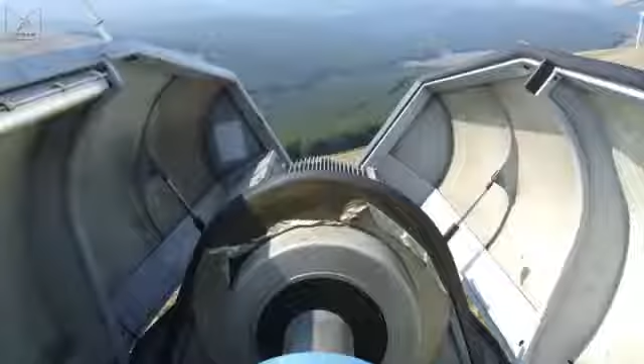Welcome. In this video, we'll show you the layout of a typical wind turbine generator as found on wind farms across the world. Now, exact designs do vary, but almost all the turbines in use today are horizontal axis machines, which have a three-bladed rotor spinning in a vertical plane attached to the front of a box which we call the nacelle, after the fairing around an aircraft engine. And in this nacelle we have the generator, often a gearbox, and occasionally a high-voltage transformer, and the whole thing sits on top of a tower, which is mostly there to keep the blades from digging a hole.

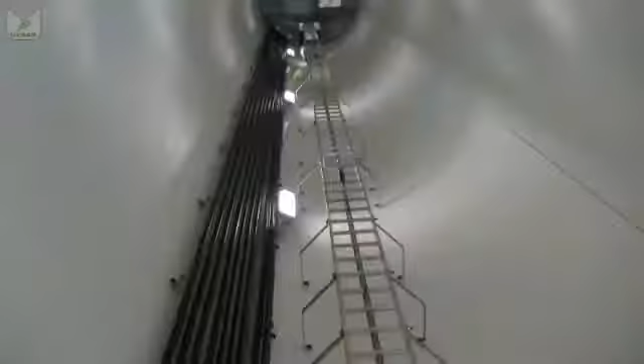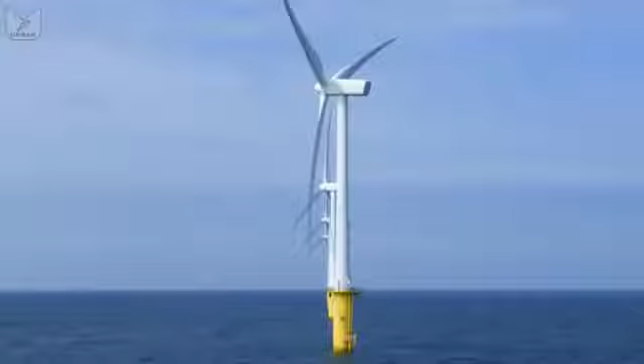We tend to class turbines by their power output, and hence their physical size. Wind farms might use many sub-megawatt turbines, each producing 400, 600 kilowatts each, or a few multi-megawatt turbines, producing maybe up to 3 megawatts per unit. Apart from physical scale, they are arranged a bit differently, so let's start by looking at a typical sub-megawatt model.

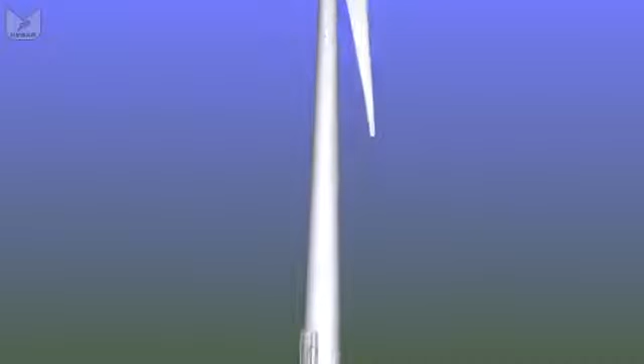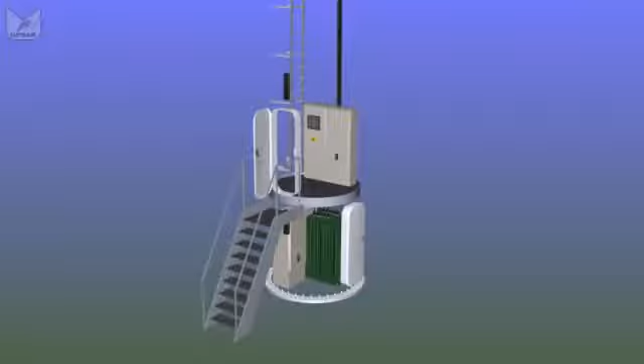Turbines of this type are typically 25 to 45 meters tall, and at the base you will often find two doors. The lower door takes you into a secured compartment where we have a high voltage step-up transformer. The generator at the top of the turbine is producing about 690 volts, and this transformer converts that into several thousand volts to send it more efficiently to the substation. The main entrance to the turbine is at first floor level, and there we find the control cabinet and the base of a ladder, or a series of ladders.

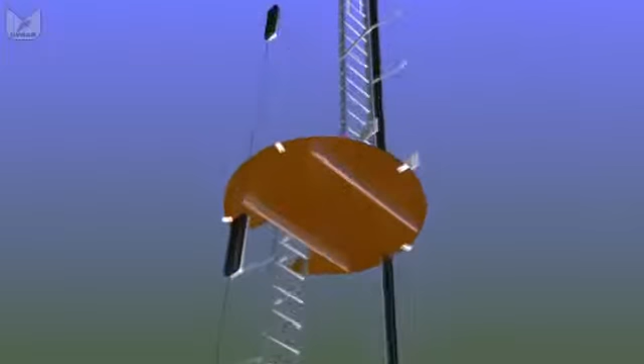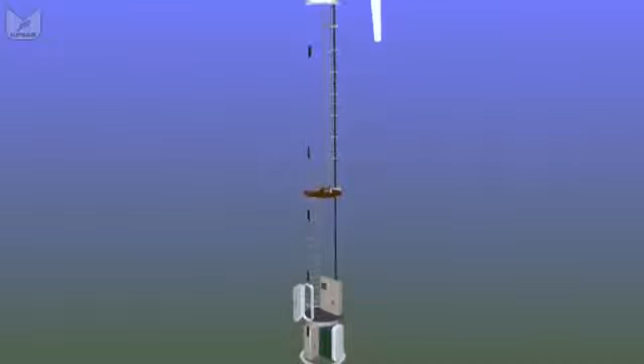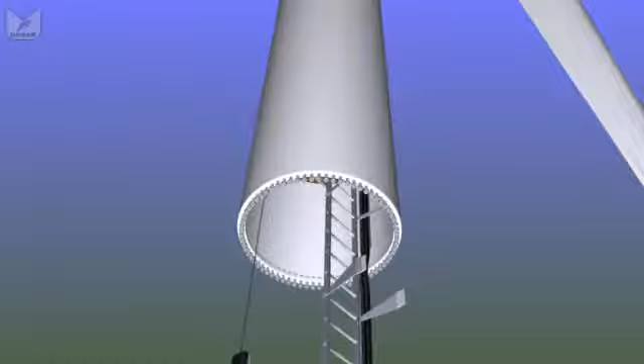Often in these smaller turbines, the ladders run to a series of platforms and they change sides at each platform to give you a rest area and a bit of fall protection. Platforms are generally just wooden discs suspended inside the tower walls, and they might have a trapdoor or a set of guardrails and a gate depending on how the ladders are arranged. The main run of cables goes up the wall of the tower, dodging past any intermediate junctions, because obviously the towers can't be delivered in a single 40-meter long section. They come in 20-meter long sections. They're bolted together with a lot of nuts and bolts. But as we move higher and higher through the platforms, they're getting slowly narrower and narrower, so the ladders are getting a little bit closer together.

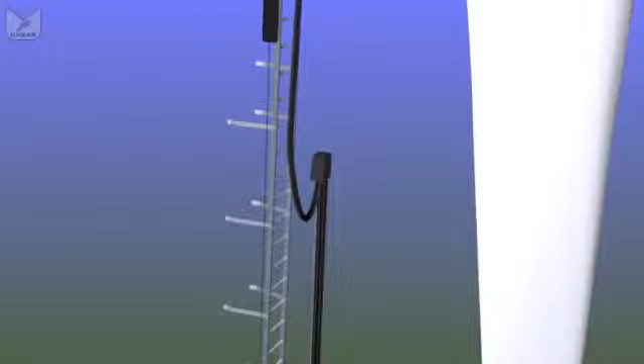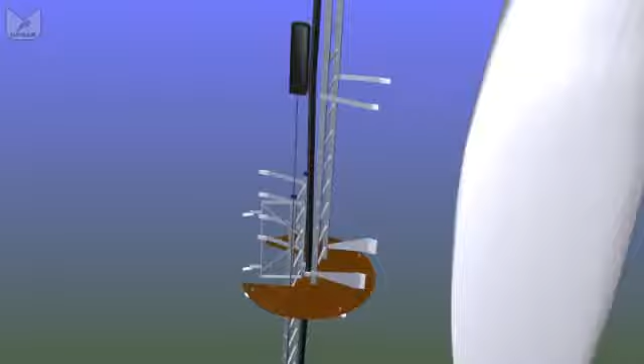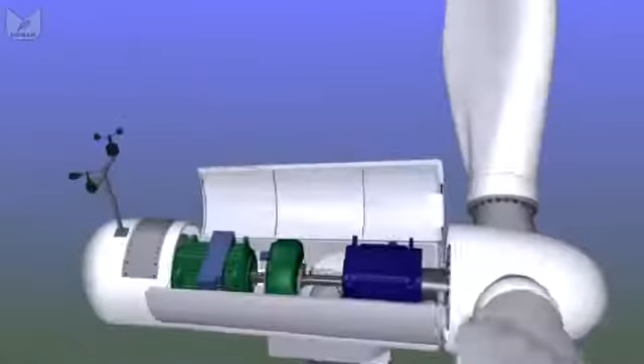But eventually the main cables stop being attached to the wall and they hang freely in the center of the tower, so they can twist as the nacelle rotates to face the wind. If they twist too many times, the nacelle will spin itself around to remove the twists. But as we move up, now the cable goes through a hole in the center of each platform, and at the top of the tower we have a steel platform with a sealed trapdoor, which we call the yaw platform. Just above that we have the yaw ring with the bearings that allow the nacelle and the rotors to rotate around to face the wind. And this sealed platform acts as a bit of fire protection, also avoids people falling back down the tower, because at the bottom of the nacelle we simply have a hole through which we climb.

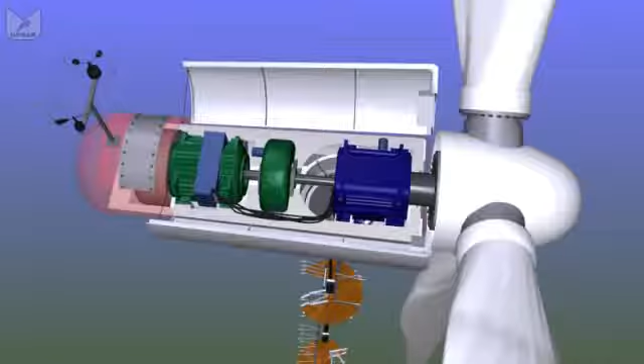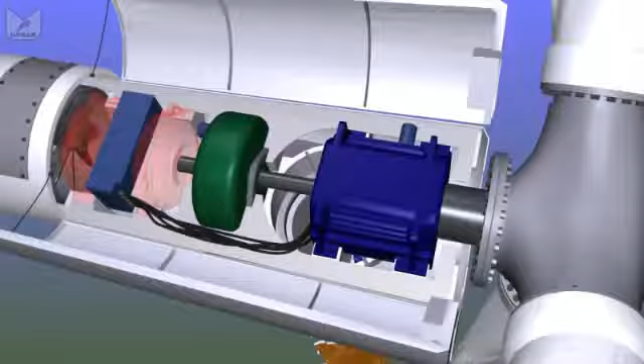And the nacelle in this case is a vaguely tapered tube. At the back we have the wind sensors, which give us speed and direction and allow the turbine to face into the wind and to change the angle of the blades. The nacelle itself is just a fiberglass tube. At the front we have a similar fiberglass cowl protecting the hub, which is a steel casting on which we have bolted our three blades, and the blades can turn or pitch so that the angle they form with the wind can be varied. Out of the back of the hub we have a shaft which leads into the gearbox, then a high-speed shaft through a brake into a generator, and that generator then supplies the electrical power, as I say, at about 690 volts all the way back down the tower to the base.

And right at the back we have a cooling fan, as we're generating 500,000 watts of energy inside the nacelle. Some of that is wasted as heat, and without an efficient cooling system there is the potential for the turbine to catch fire. Now, the layout of a larger turbine is broadly similar, but some of the components are in different places, so let's start by looking at the tower section of a typical 2 megawatt turbine.

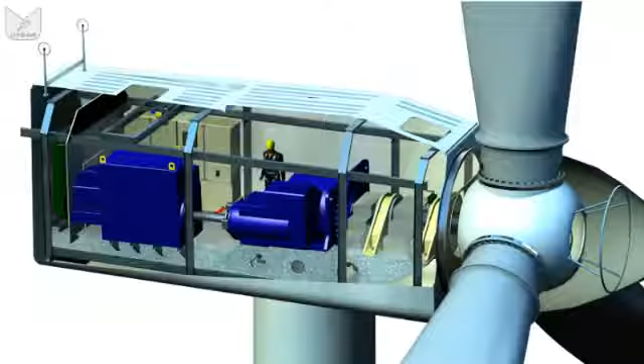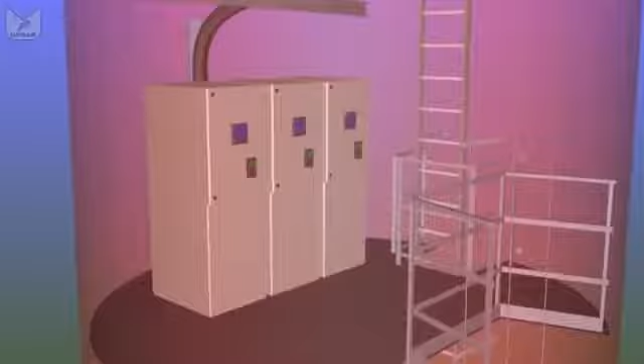Where we place the high voltage transformers in multi-megawatt turbines is a lot more variable. Quite frankly, we have a lot more room, so we can decide if they can be in the nacelle, they can be at the base of the tower, they can be on platform 1 in the basement, they can be outside in a hut. In this example, the transformer's at the top, so when we go into our door, the one thing we'll not find is a transformer. We do have the high voltage switches, in this case on platform 2, but on the entrance platform we have the usual control cabinet and a lift, a little green box.

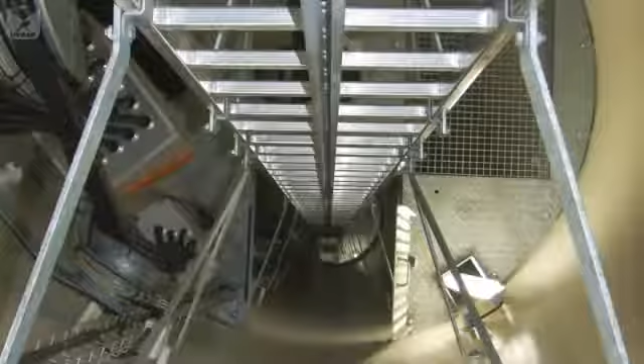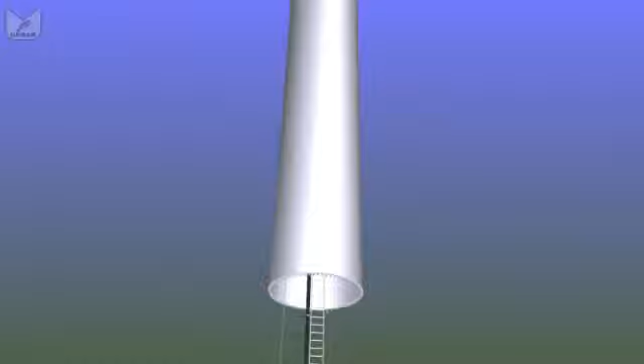And that lift will take two people to the top of the tower, or nearly to the top, without them having to climb the single, very, very long ladder. Almost all large turbines will just have a single run of ladder for the majority of the run up the tower. It will have a wire or a rail system, a fall arrest device fitted to it, but it is still a long slog up the ladder, which is one of the reasons why service lifts are so important.

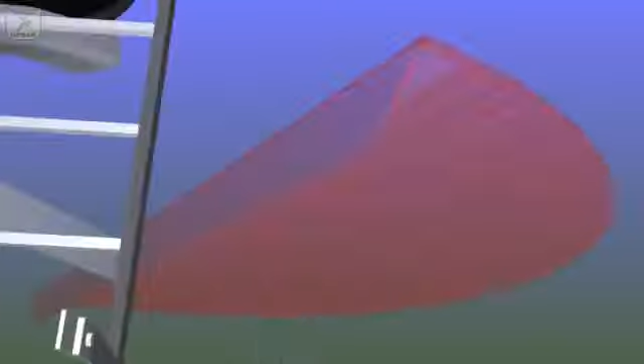And again, the tower's in sections so that it can be delivered around the country without demolishing villages. Sometimes, if we're running a long distance and we haven't got room for a proper platform, we can put a half moon in place. No fall protection on the platform, but we assume you would keep your lanyards connected at this point because it's quite a long way down.

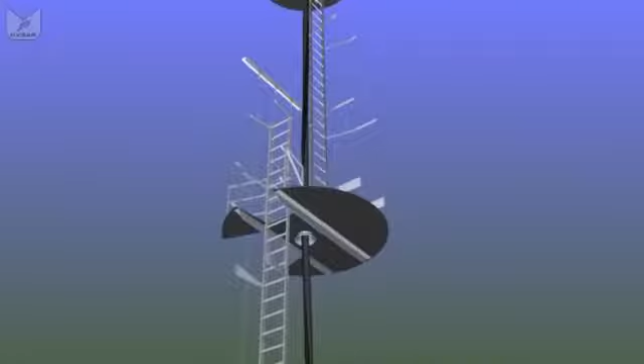The cable again breaks free from its mounting and hangs in the centre of the tower for the last 10-20 metres or so that it can rotate as the nacelle yaws into the wind, and the lift eventually runs out of space. Remember, the tower is getting narrower and narrower as we get to the top, so the lift tends to park itself about half a platform from the top, and we have a normal ladder which then leads to the yaw platform, and then it starts looking very much like the smaller turbine did.

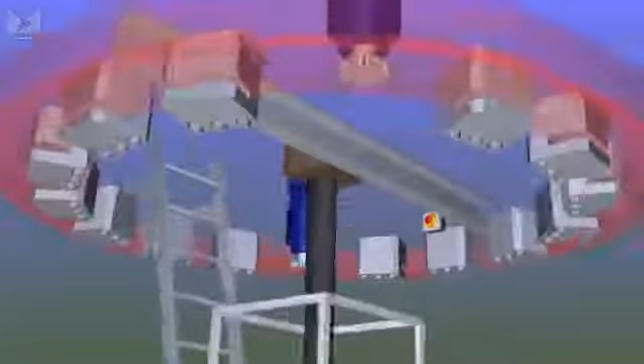We have a yaw ring bolted to the underside of the nacelle, joining it to the top of the tower. A series of disc brakes run around that yaw ring to lock it in position when the wind isn't changing direction, and when it is, we have a series of either electric or hydraulic motors that rotate the entire mechanism around on the top of the tower.

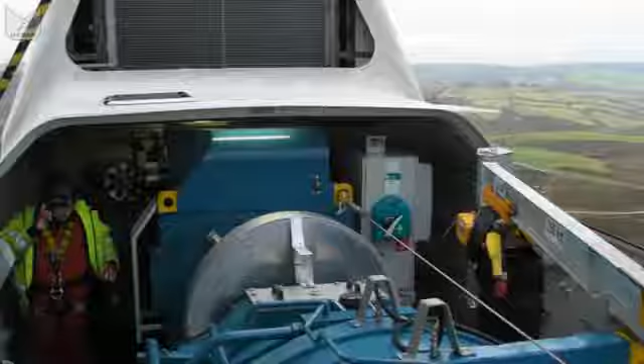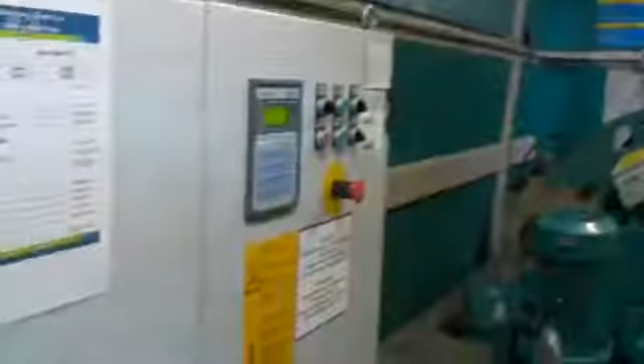The layout of a multi-megawatt nacelle is again more variable than for a smaller version. We always have to have a generator, but we may not have to have a transformer. In a few cases, such as the famous Enercon egg-shaped nacelle, we don't even need a gearbox. They're direct drive. We just have a shaft linking to a generator, and then lots of extremely complicated electronics to condition that power for connection to the grid. But in most cases, we need the same as we needed in the small turbine. Gearbox, generator, possibly a transformer, all in a fiberglass box.

And in our example, we're looking at a typical design used by a number of manufacturers where we have a nacelle that's 3 metres high, 2.5 metres wide, 7 or 8 metres long. It's a fiberglass box about the size of a site hut. As before, we have our wind sensors on the roof as far away as possible from the dirty air cast off by the blades as they spin round.

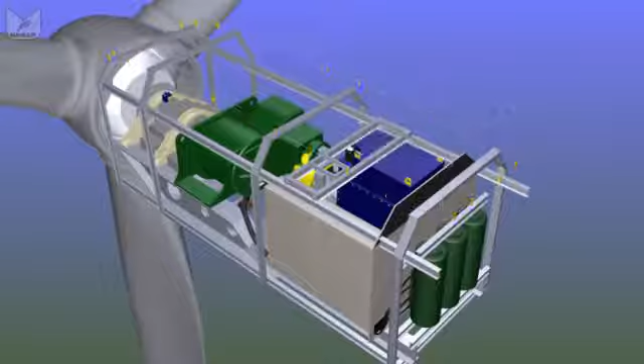This design is just a fiberglass box with a flat roof. We access the roof through a couple of skylights. Some designs are like before, big cylinder with 2 opening doors. Some have an entire roof section which opens, rather like an old camper van. If we take the skin off the box, inside we have the same kind of components we had before. They're just bigger, and there's a little bit more room, so they're laid out a bit differently.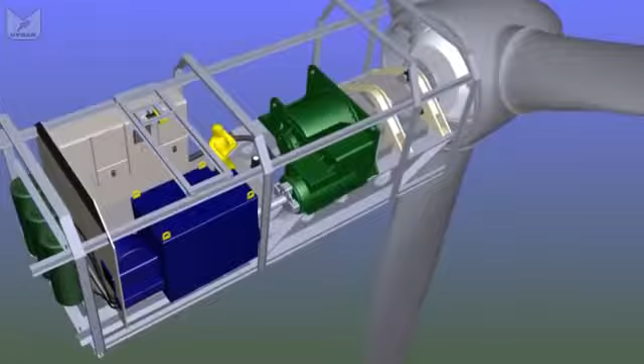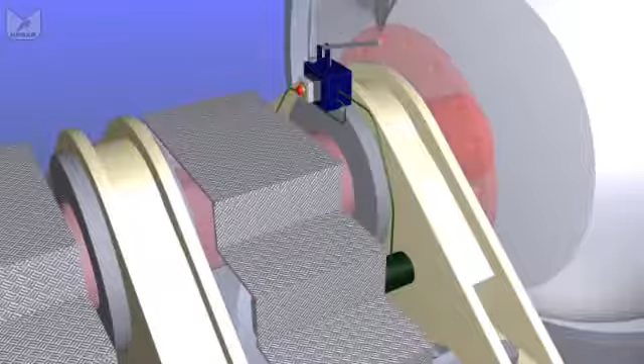If we look at the very front of the nacelle, we have a couple of bearings which support the main shaft, which is a hollow tube, 50, 60, 70 centimetres in diameter. It's hollow so that we can get electrical cables in through this main shaft into the hub to drive all the control systems inside the hub. And we have a couple of pins on the first bearing that lock the main rotor in position if we need to access the hub. It's a safety feature. If you're in there and it starts rotating, it gets scary.

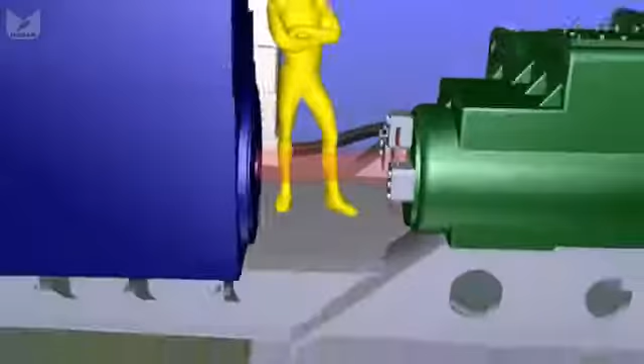So our main shaft drives our gearbox, which is mounted centrally because it's often the heaviest component. Out of the back comes a high-speed shaft, as before. That's where the braking system is. The high-speed shaft then drives the generator, which is usually oil-filled. The generator then supplies 690 volts, in this case into our transformer, which is sitting right next to it. That high-voltage signal then passes through the switchgear and the cabinets, down the dropper cable, straight down to the bottom of the tower, through those switches on platform 2 and off to the substation.

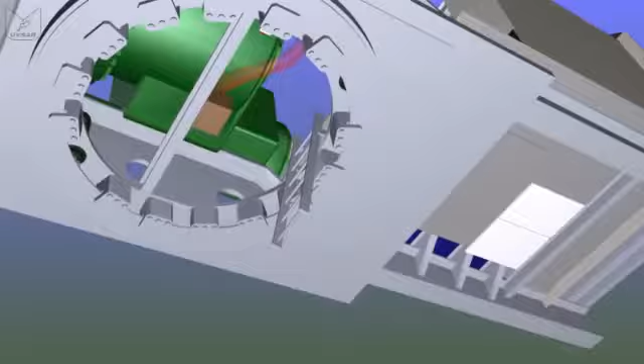And that, as an overview, is pretty much all there is to it. The only thing left to talk about are the blades, obviously, which actually do the work. We still have 3 of them. They still pitch, in other words, they twist on themselves to line up with the wind. And you access the hub through the gap between this fiberglass cowl and the cast hub.

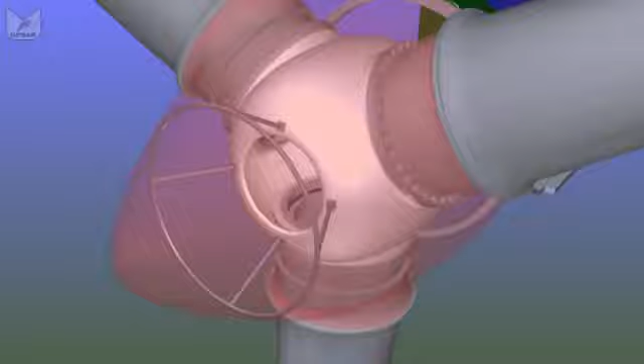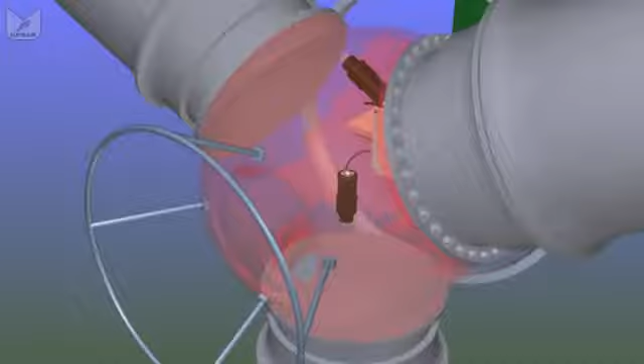It's a bit of a wriggle, but you wriggle through, usually feet first, crawl through the hole in the middle of the hub, and inside the hub we'll find the control electronics, the pumps, the motors and the batteries to control the pitch of each blade, rotating it on its own bearing to set the optimum angle for the wind. If we turn the blades through 90 degrees so they're edge on to the wind, there's no net turning force. It's a process called feathering, and the turbine will stop.

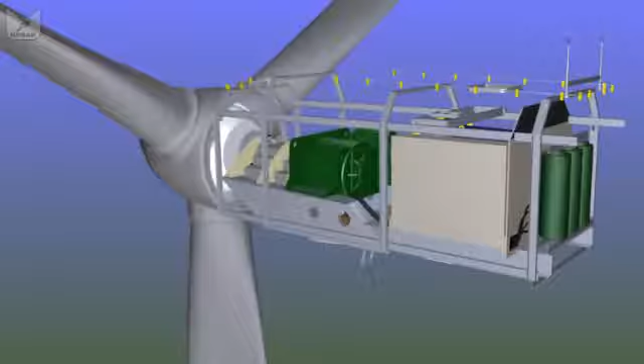Obviously there is a vast amount more going on inside a turbine, lots of wiring and control systems and lights and sensors and fire extinguishers, etc. But that is basically it, the general overview of most turbines that you find on wind farms today. Designs for the future will be significantly different, but at the moment, it's a windmill on a stick.